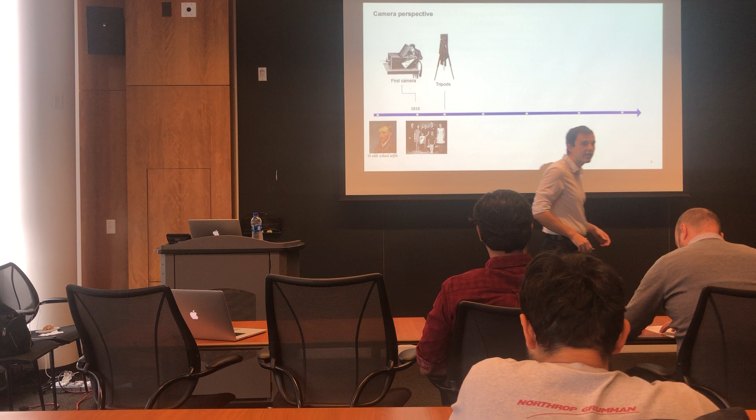So I'm going to begin with the motivation behind this topic and also some of the related work. The act of recording images is something that's intrinsically human, and we have been doing this for millennia. For a very long time, the only way to record images was using paintings. But then in 1816, the first camera was invented, and this has changed the way we do many activities in human life.

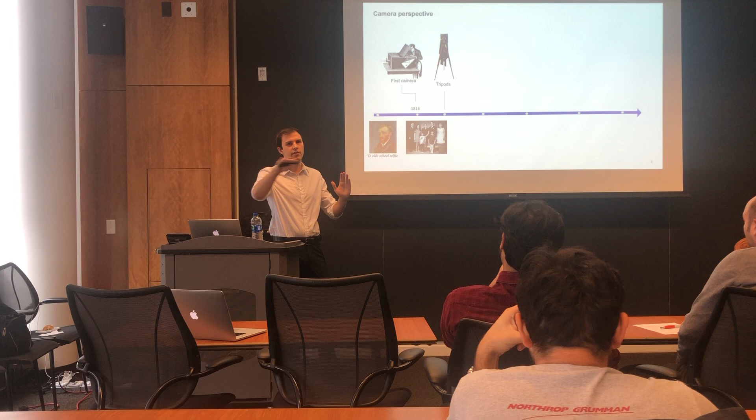But in this talk, I'm going to focus specifically on camera perspective and how it has evolved over time. Initially, people placed cameras either on top of tables or on tripods, and the kinds of images you got were usually on the horizontal level, and they were very static scenes.

But then, an invention came up in 1907, the dolly. The dolly is basically a camera on a rail, a camera on wheels, that you can move in a particular direction. This allows you to apply the notion of movement, of continuity, to an image, or in this case, of movies.

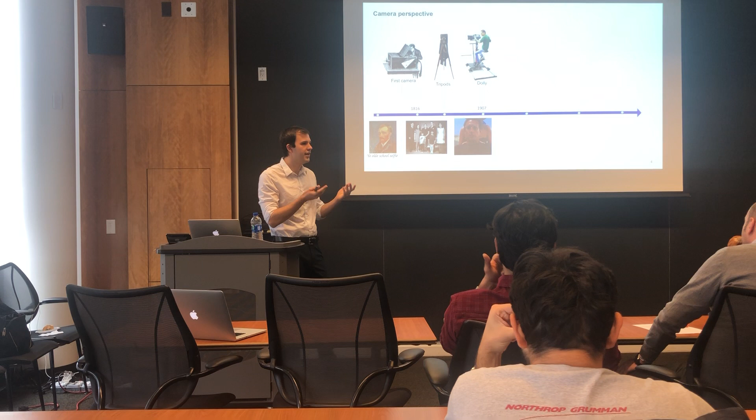Another very important invention that changed camera perspective was the selfie stick. Like today, the selfie stick is kind of a joke. It became very popular, but it's actually quite an old invention. Supposedly, according to the internet, this was the first selfie ever taken in 1925. What's nice about the selfie stick, jokes apart, is that it allows the operator to have this third-person perspective of him or herself in a very easy manner.

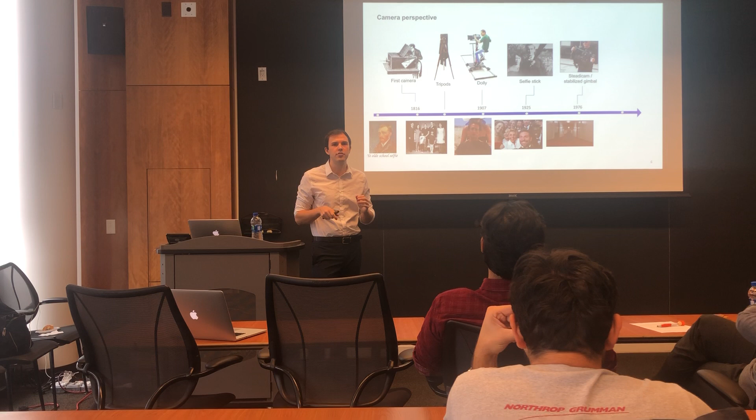Another big innovation that came about 50 years ago was the Steadicam, or the stabilized gimbal. What's interesting about this is that you're not constrained to rails like in the dolly when you're trying to move a camera, because the stabilization allows you to generate very visually appealing images while traveling in any direction.

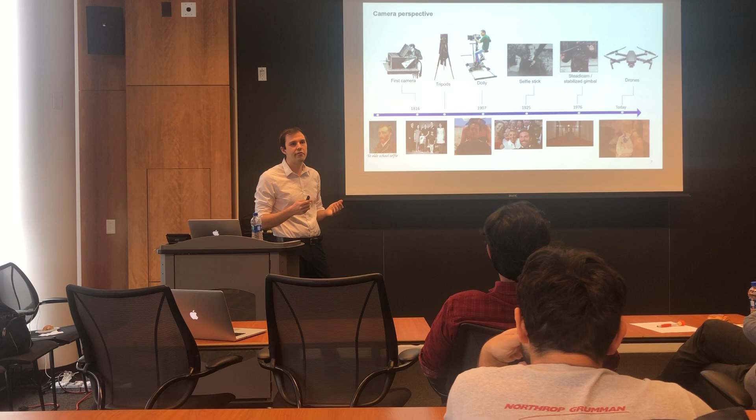And the last thing I want to talk about, and actually the focus of this presentation, is drones for filming. Drones are a very interesting invention because drones with cameras take advantage of all these previous technological innovations into one single device, and they allow us to achieve viewpoints that have never been possible before.

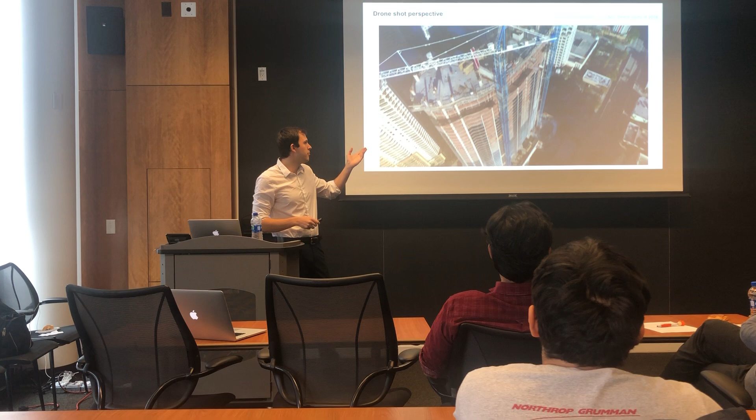These are just a few examples of very nice footage obtained with drones. You can see that we have these third-person view perspectives, very stabilized images, and we can achieve motions without the constraint of rails. We can film landscapes, actors, and moving objects in a very cheap, reliable, and safe way.

Now, there are many applications where we can use drones or the images generated by drones. For example, we can record sports, both indoors and outdoors, professional movies, recreational activities, any kind of social event. These are applications where what matters is the actual image produced by the drone.

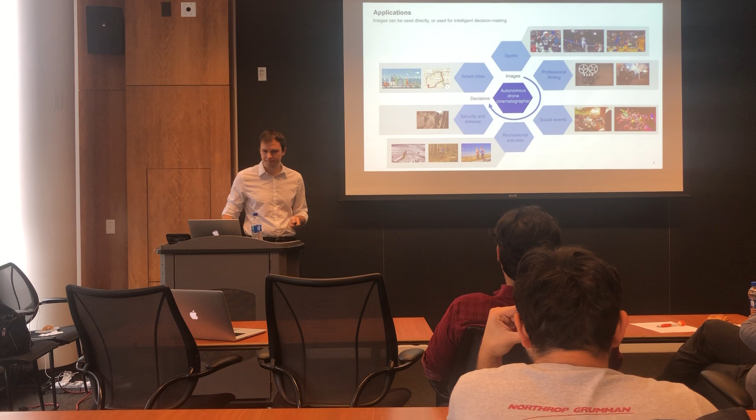But we can also think of applications where what matters are the decisions we're going to make based on those images. For applications like defense and security, you're going to follow a target and make decisions based on what you're seeing. Also, we can think of a very hot topic nowadays, smart cities, where you could use the images generated by drones to understand traffic patterns and the flow of people in the environment.

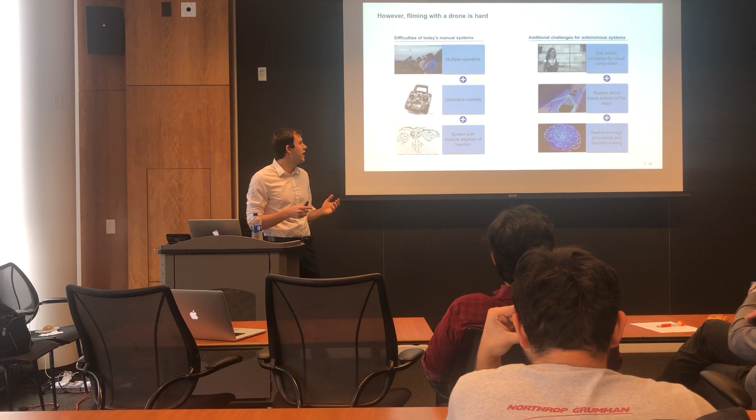But the act of filming with a drone is really hard, because it's a very complicated system, and in practice you usually have multiple operators controlling one single drone. Usually one operator only controls the aircraft itself, a second operator controls the camera independently, and sometimes you even have a third operator that controls just the focal distance of the lenses.

You also have very unintuitive controls. Usually those RC controllers are related to the attitude of the aircraft, but what actually matters when you're filming is how the image looks on the screen. A drone is inherently a system with multiple degrees of freedom, so it's hard to control in general.

And there are many more challenges that come when you're trying to automate a system like this, because you have to take into account a lot of artistic principles into your motion plan, and these principles are usually in the mind of the director, of the operator of the camera, but you have to take them into account analytically. You also have to, if you're filming moving scenes or moving objects or people, take into account forecasts of what's going to happen next in the scene.

And you have to do all this processing and decision making online and on board, which is non-trivial given that we have small and non-powerful computers usually on top of drones.

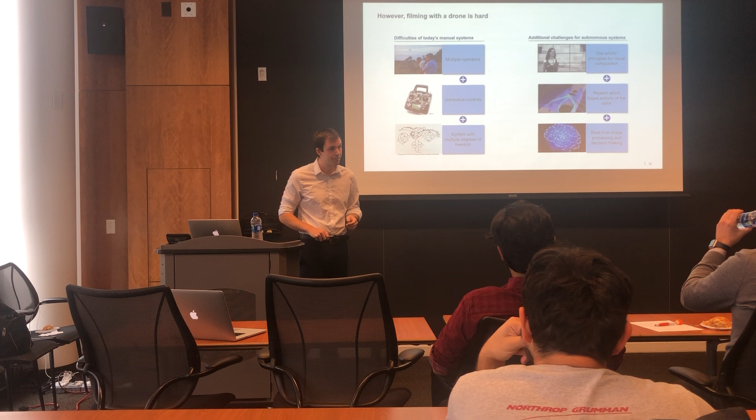Now let's look at some related work that gives us the big picture of which area is the area of drone filming. The first one that we would think about is related to UAV applications, such as high-speed flight, formation flight, or inspection.

But we also have to take into account aspects from computer graphics and arts, such as placing cameras on virtual environments, and also there's a lot of literature on the principles behind movie making, like in Hollywood settings, for example.

And a third big area that intersects with those two is motion planning, because we have to take those artistic principles into account and generate feasible motion plans. And we also have to represent the environment around us somehow.

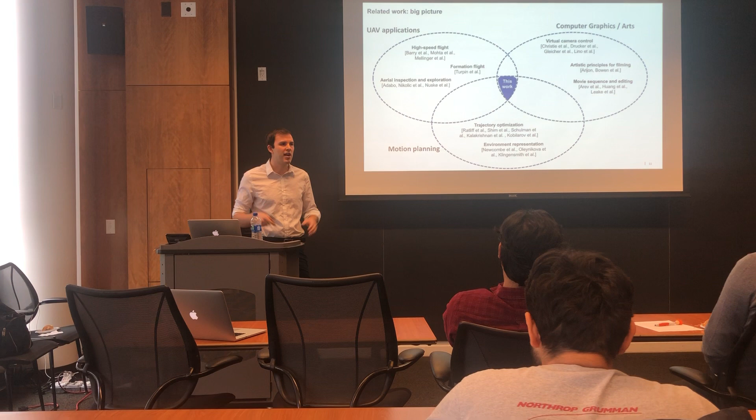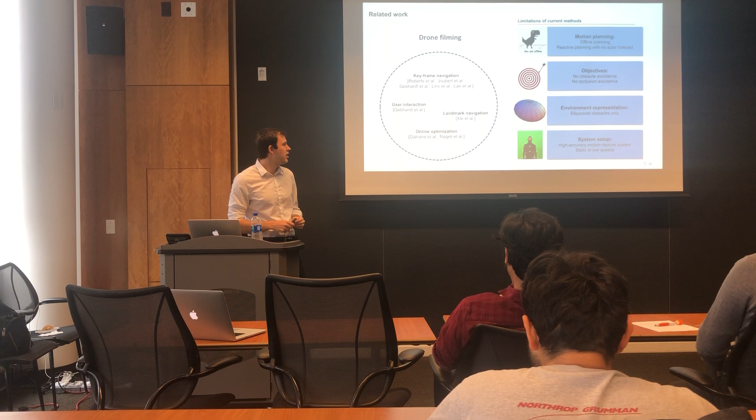And specifically on that intersection, on drone filming, we also find some work that has been done. There's a lot of work on keyframe navigation, or on the user interaction between those cameras and whoever is operating them, landmark navigation, and even some work on optimizing trajectories online for filming.

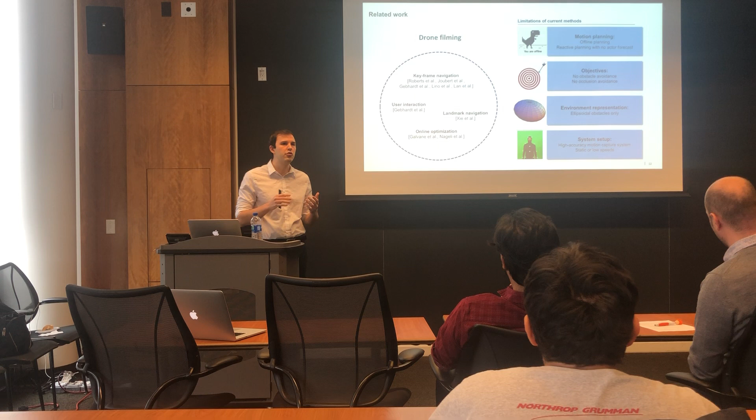But even though these previous works take a very nice step towards making these systems deployable in practice, there are still quite a few limitations. In terms of motion planning, many of these works only deal with offline planning, so you must have very scripted scenes. Or they sometimes plan without any notion of forecasts of what's going to happen next, so they have very reactive motions to changes.

In terms of objective functions, some of these papers don't deal with avoiding obstacles at all, and most of them don't deal with the concept of occlusions generated by obstacles on your image.

We also see very simplistic environment representations in most cases, where they treat all the objects in the environment only as ellipsoids, but in fact we have any kind of shapes for obstacles.

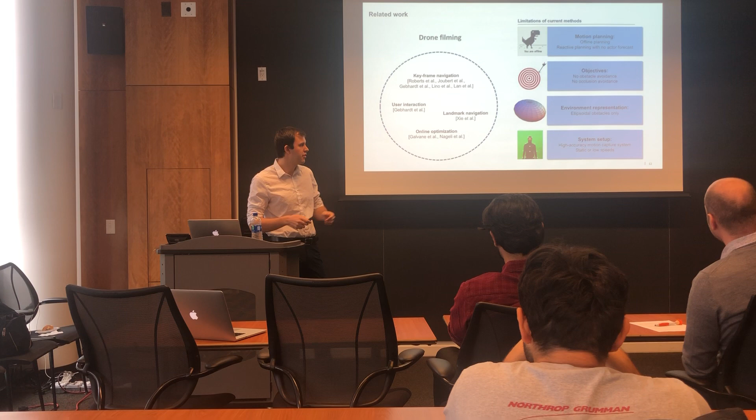And fourth, we see some limitations in terms of system setups. Most of these papers only deal with motion capture systems where you have a very accurate localization of your actor. But in practice, you have a lot of noise when you're trying to localize a person or a car, etc. in space. Or they only deal with very static or low-speed scenarios.

Based on these limitations that we see in previous work, we defined our objectives, our contributions in this paper, where in terms of motion planning, we want to plan motions online using forecasts of what's going to happen in the scene. In terms of objective, we want to avoid both obstacles and occlusions.

We want to be able to represent obstacles of any shape, not only ellipsoidal shapes. And we want to be able to work in realistic, high-speed environments, being able to film any kind of actor, like people, bicycles, or cars.

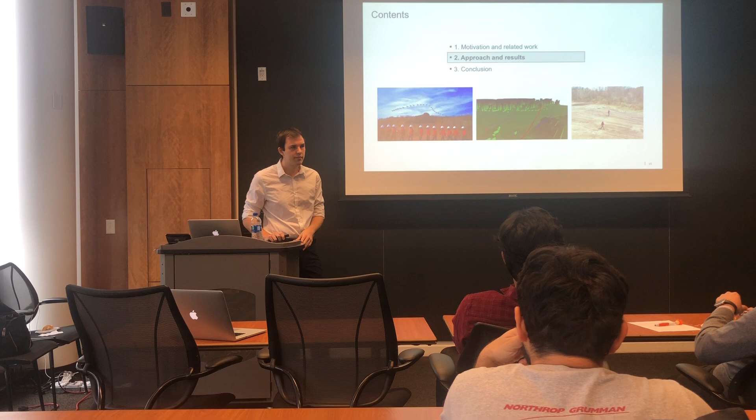Now that we know our contributions, I'm going to explain to you our approach and give some results. And before I jump into the approach, I just want to show a quick video so you can understand what the system is doing in practice.

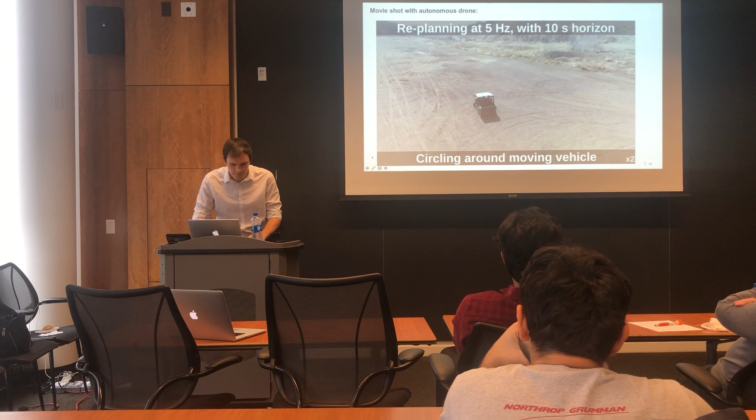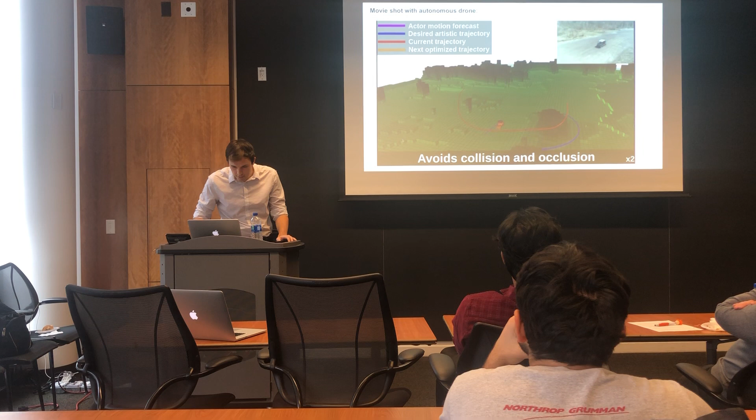So this is a fully autonomous shot taken with our system, and the drone identifies the actor's location. It's doing a circular movement around the actor. And I'll just pause for a second to highlight a few things.

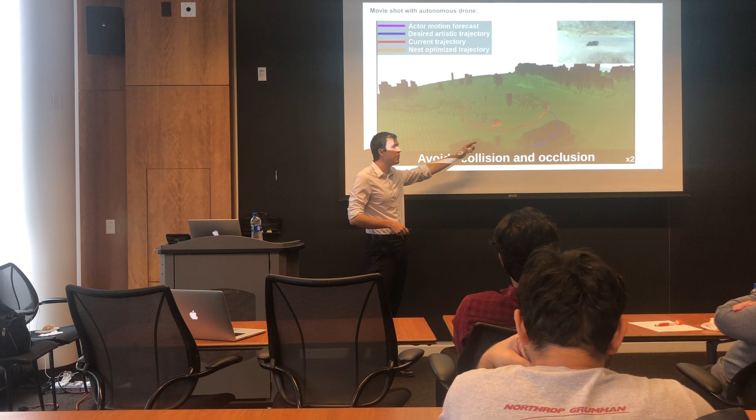Given measurements of the actor's current position, we feed them to an activity forecasting module that gives us, using a Kalman filter, this purple trajectory over here. That's an estimate of where the actor is going to be in the next 10 seconds.

And given this forecast and the director's artistic principles, we calculate the blue trajectory that tells us where artistically we would like to be if there were no obstacles in the environment. In this case, we're circling around the moving actor.

But you can see that the blue trajectory is either going to collide with the mountain at some points, or it's going to be occluded by the mountain. And that's why we plan for the red trajectory online that avoids colliding with obstacles and avoids being occluded.

We can also handle different types of shots and actors. In this case, I'm riding my bicycle, and we're doing a right side shot. You can see that the drone smoothly adapts to go to my right side, avoiding this mountain, and re-planning online.

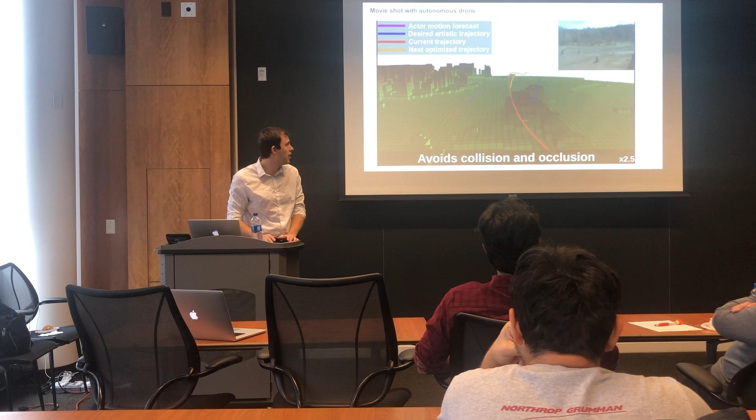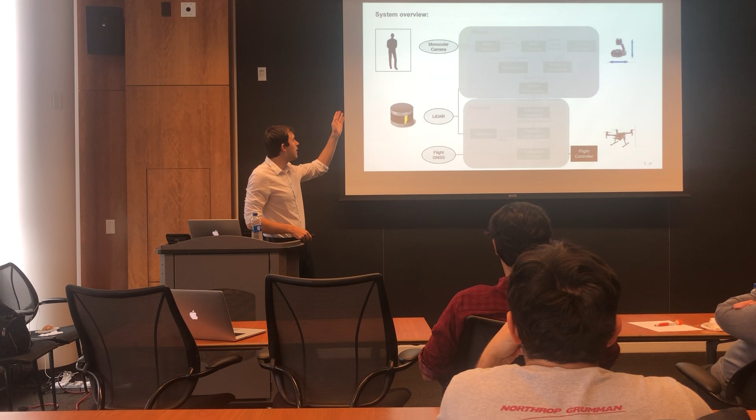Now I'll talk about the actual system that we have. Before I go into the details, I want to show you the inputs and outputs. As inputs, we have the image from the camera, so it's a monocular image.

We also have LiDAR information about the environment that creates the map. Just a disclaimer, for the results you'll see in this presentation, we made an offline map. But as future work, we're already working on putting a LiDAR to map any kind of environment as we fly.

We also have the drone's state estimation gained from IMU and GPS. As outputs, we can control the camera independently of the movement of the drone itself, and of course, we can control the drone.

Let's look at the first big box. This is what we call the vision pipeline. What happens here is from the monocular image from the camera, we detect the actor, getting a bounding box of the actor. After the initial detection, we track this template over time in the next incoming frames at a higher frequency than the detection.

Over here, you can see that we can control the gimbal to maintain the actor on the desired position on the screen. So even if the actor tries to move, we're going to actively control the gimbal to keep him, let's say, centered, or you can use other artistic principles for that.

After we have a bounding box of the actor, we do two things in parallel. The first one is what we call ray casting. We project a ray, usually at the bottom of the bounding box, which corresponds to the feet of the actor, onto the ground plane, so we get an estimate of where the actor is at this moment in world coordinates.

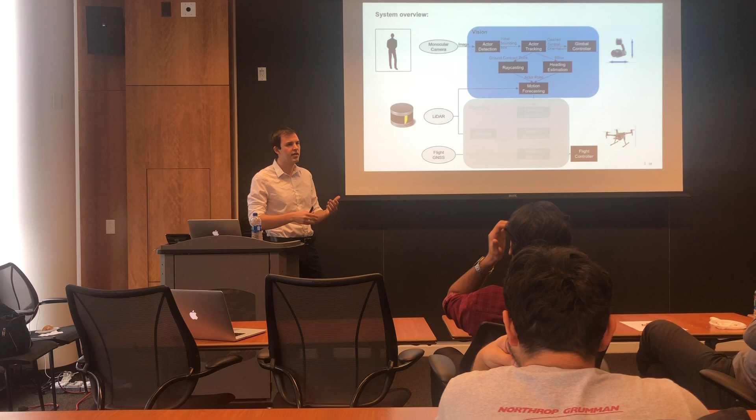The second big part of our system is what we call the planning pipeline. Given the actor's motion forecast, the map, and the drone's state, we calculate a trajectory, and then we follow this trajectory using our drone.

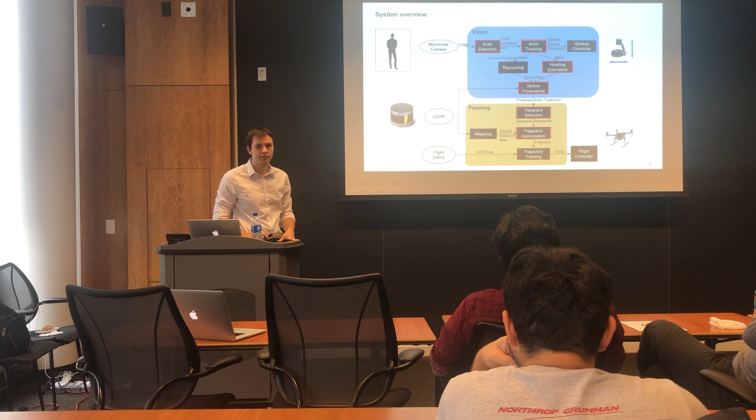Now I'm going to explain to you a few of the most important pieces of this system. The first one is the actor detection and tracking module.

The first thing that we do is we get this monocular image from the camera, then process it with a custom trained neural network. It uses the MobileNet architecture to get some features of this image, and then a YOLO detector that gives us the most likely bounding box around the actor. This operation takes about half a second on our onboard computer.

After we get this initial bounding box, since this operation takes a while to detect, we just track that template over time in the next incoming frames with a KCF filter. Lastly, we actively control the gimbal to keep the actor on the desired screen position.

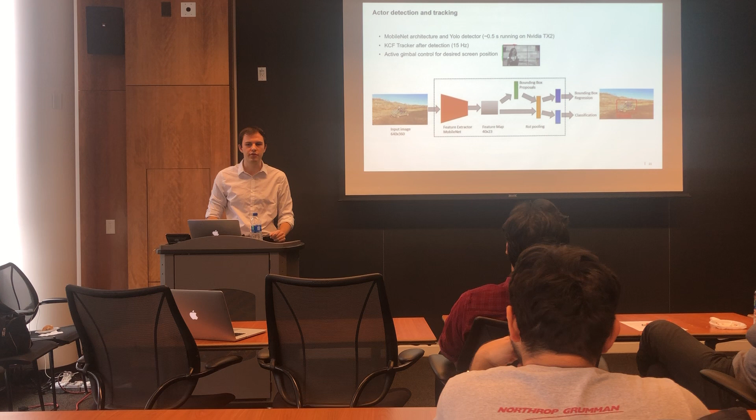After we get this bounding box, after the detection and tracking, we have two modules happening in parallel: the ray casting and this heading estimation module. Here, we regress the image from the bounding box into a heading angle for this actor.

There was a lot of interesting things in this work, because there's not an actual aerial dataset with heading directions labeled, so we had to create our own dataset. Then we faced this issue of obtaining enough training data for the system, and that's why we used both the labeled losses to train our network, but also exploited the concept of temporal continuity, because usually the actor doesn't change heading very drastically between consecutive frames. So we also exploited this information while training.

But the focus of this talk is not really this module, even though it's very interesting. Feel free to talk to us offline and ask more about this. And Wenshin, who's sitting here, was the main contributor in this part.

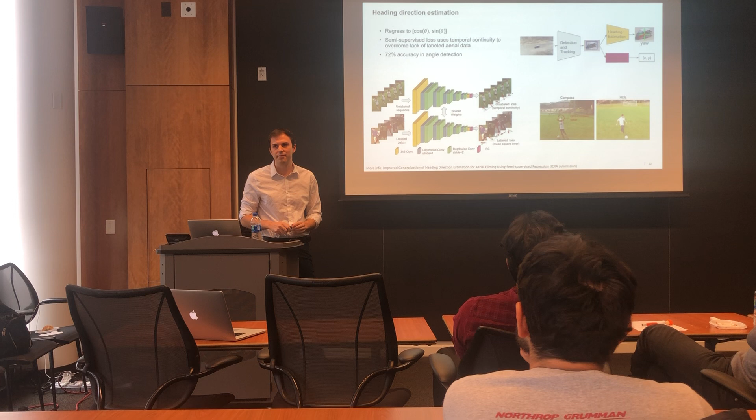After we get an estimate of where the actor is and the current heading direction of the actor, we feed them into the motion forecasting module. For this, we use a Kalman filter with both kinematic models for people and for cars.

We have to make this separation because people can change directions and velocities much more suddenly than cars, which are constrained by steering angle. This Kalman filter works quite well in practice, so most of the time we see almost linear trajectories for the actor.

This is an example: in white we have the ground truth, in green we have the forecast for the next few seconds. It matches quite well, but we also see a few examples with bad predictions.

If the actor does a drastic turn to another side, you get an offset. Also, imagine there's a tree in front of the actor. The Kalman filter only uses kinematic information to make its predictions, so it would predict that we'd go through the tree, but in practice you would either go left, right, or stop.

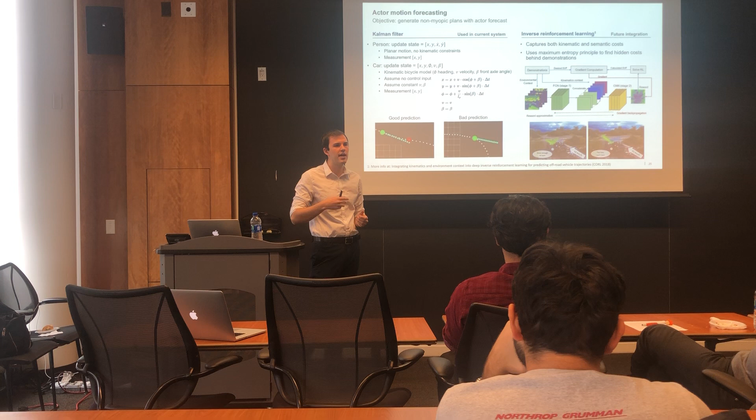This motivated us to try another method for forecasting actor position using inverse reinforcement learning. Based on a lot of demonstrations of an off-road vehicle driving on trails, we tried to extract a reward function—the implicit costs that the driver tries to optimize when going through the trails.

This was also quite an interesting paper that we presented at CoRL earlier this year. If you're interested, you can ask more details offline, but in our system we're using the Kalman filter, and those are the results you'll see today.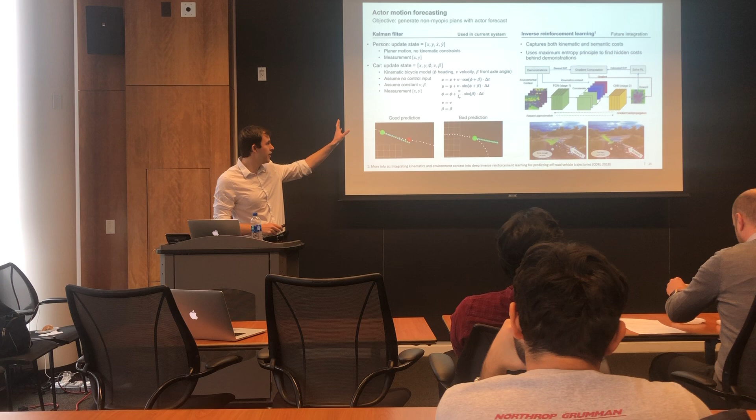Now that we know where the actor is heading in the world, we have to think about the motion planner. There are a few things to consider when thinking about the planner. The first is, what is going to be our state representation?

We need a state that's able to accurately model our quadrotor, but we also don't want to represent unnecessary states that would just make our motion planner slower. We also have to design cost functions that are accurate enough to model the actual behavior of the director when filming.

At the same time, these functions have to be simple enough to run on an onboard system. Third, we have to think about the motion planner algorithm itself.

It should be complex enough that we can obtain non-trivial solutions in complex and challenging environments, but at the same time it has to be able to sustain performance in real-life conditions.

Some numbers we set as targets were a frequency of about 5 Hertz for this planner to operate at, and a 10-second time horizon. These goals were set based on the velocities involved in drone filming and the scale of objects we usually deal with, like trees or piles of dirt.

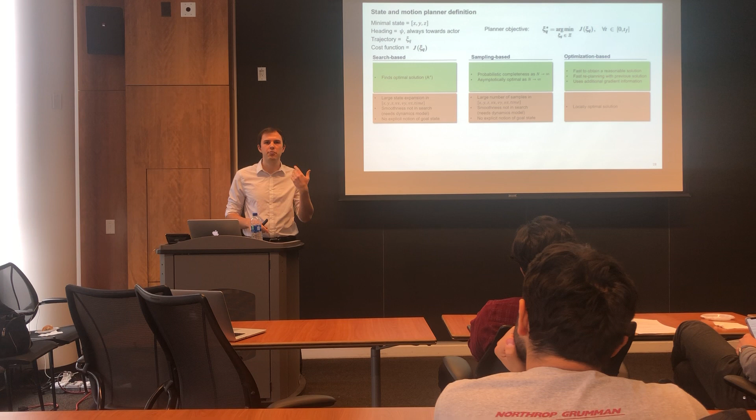The second big category is sampling-based planners. These planners also come with very nice guarantees. If you're using an algorithm like RRT, you're guaranteed probabilistic completeness, so you know you will find a solution as the number of samples goes towards infinity. If you're using something like RRT star, you know that asymptotically you will find the optimal solution. But we face the same problems as with the search-based planner of having quite a large state space representation, and that's also not very desirable.

The third big category is optimization-based planners. These planners have some interesting properties for our problem because they can obtain a reasonable solution that's going to be locally optimal, but not globally optimal, and they can do that very fast. They can easily take advantage of a good initialization, and usually we use the solution of the previous planning problem to initialize our next optimization. Due to these properties, we thought that optimization-based planners were more appropriate for our problem.

But there are many techniques inside optimization planners that could still be used. You have what are called potential fields, which basically try to repel your state away from obstacles. These are some of the first optimization-based planners developed. You have model predictive control, where you require a pretty good model of the dynamics of your system, and you optimize for both the optimal states for this trajectory and for the control outputs together. But a disadvantage is that since this is quite a complex optimization operation, you end up in practice only having very small time horizons, such as half a second or maybe one second into the future.

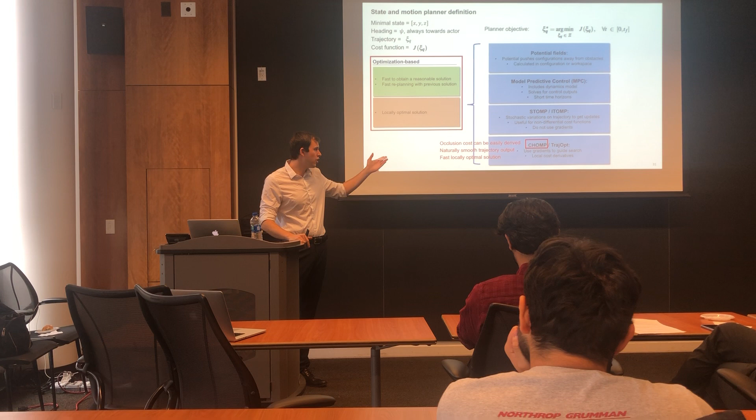From those two methods, we modified the CHOMP motion planner. I thought especially the definition of the occlusion cost function could be nicely derived by using some properties of the obstacle avoidance cost of CHOMP, whereas in TrajOpt this derivation is not so trivial or simple. CHOMP also gives us a naturally smooth output as the solution, and it gives us the solution quite fast. That's the rationale behind these choices.

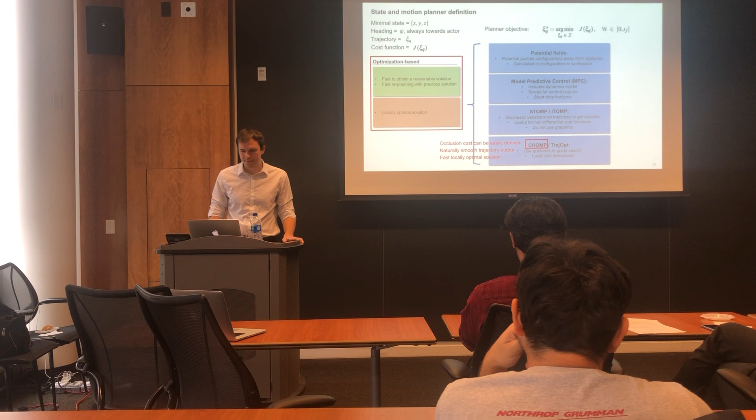Now that we've defined the state representation and the motion planner, we can move to the definition of cost functions. The way I came up with these cost functions was by reading a lot of books on cinematography, reading related work, and also having talks with movie directors and actual cinematographers to see what objectives they try to optimize when filming. In many cases it's quite intuitive for them, and they sometimes have a hard time even explaining it to somebody else. So it was an interesting process.

The main functions I found were obstacle avoidance, because you clearly don't want to hit anything while flying; occlusion avoidance, because you usually want to have your actor in sight most of the time; smoothness, because a shaky video is not visually appealing; and the artistic intent cost, which is going to be a little vague right now, but I'll explain it in more detail later.

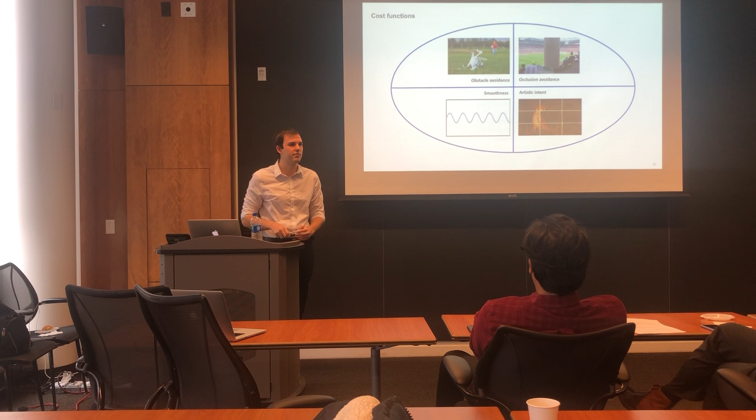And we also define a penalization, a cost C, that depends on how far away you are from an obstacle, up to a distance epsilon. So if you're at epsilon, your cost is 0. If you're further than epsilon from an obstacle, you also have 0 cost.

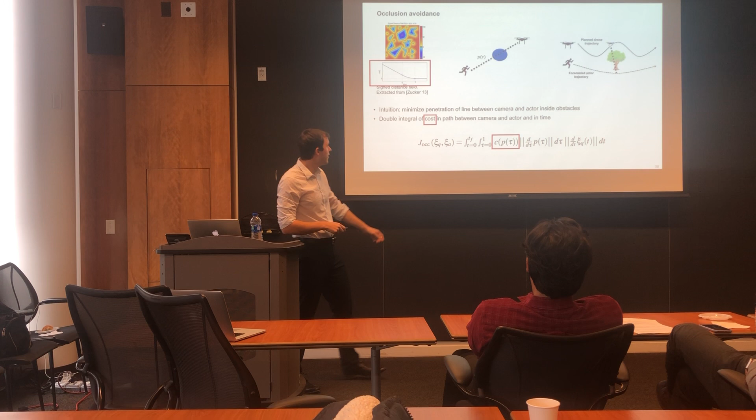So imagine that we freeze a path parameterized by tau. We're going to integrate the signed distance penalization over this path. Again, we have to multiply by the velocity along the path, for the same reasons as the obstacle costs.

But this was only for one pair of actor and camera position. Then we have to integrate this over time as well, because we want to minimize occlusion over the entire trajectory. So we're basically integrating the penalization of signed distance over this 2D manifold that connects the camera and the actor over time.

What's nice about this function is that it can be represented as a quadratic cost that has an analytical Hessian, and later I'll explain why this is really important for the optimization. In practice, we minimize up to jerk—so we minimize the first, second, and third derivatives of our trajectory.

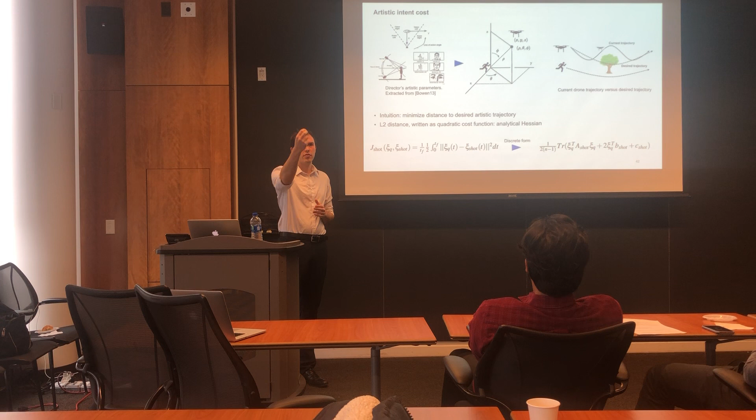And finally we come to the artistic intent cost. This cost was derived based on a lot of literature I read and conversations with directors. I tried to distill the main basic parameters that define a shot when a director is filming. The first is the line of action angle, which represents the relative yaw between the actor and the drone—so if the drone is in front of the actor, that would be 0 line of action angle.

We also have what's called the tilt angle, which tells us how up or down the drone is relative to the actor's horizontal plane. Third, we have the shot scale, which means how close or far away the camera is from your actor at each moment.

What's nice about this set of parameters is that for any position of the actor, we can define one unique XYZ position for the quad rotor based on those three parameters—basically placing the quad rotor using spherical coordinates around the actor. We can do this for every instant of time in the actor's motion forecast, and obtain what we call the desired artistic trajectory, telling us where the director would like to be for this particular type of shot.

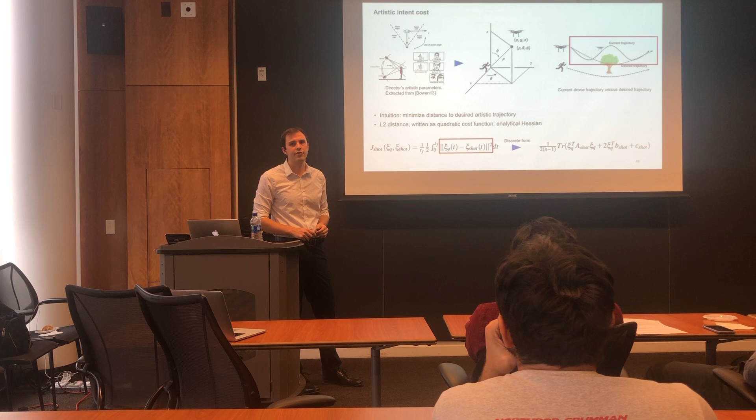When you look at the cost function for the shot quality, it's actually quite simple. We calculate the average distance between the current iteration of our trajectory in the optimization process and this desired artistic trajectory—an L2 distance. Another good property is that in discrete form it's also a quadratic cost, so we have an analytical expression for the Hessian.

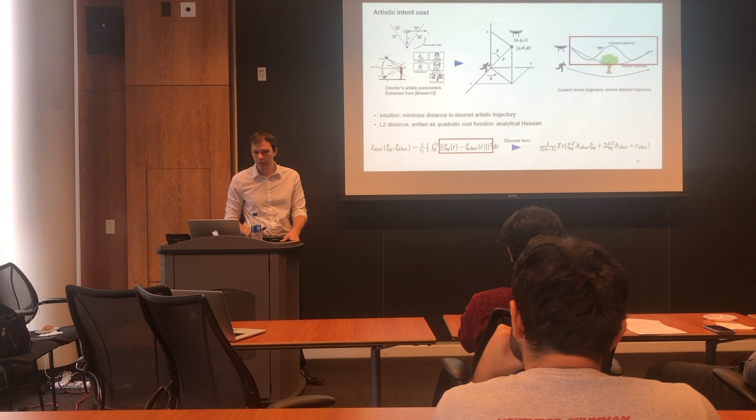Now that we defined all 4 cost functions, we can define the main cost function J, which is simply a linear composition of all 4 costs, each multiplied by a relative weight lambda. The objective of the planner is to find the trajectory that minimizes the overall cost.

Here's where we adapt the CHOMP algorithm to our particular planning problem. Initially, we get an initialization for trajectory ξ of the quadrotor. Then the first step is to calculate a matrix called M inverse, which is basically an approximation of the Hessian of our cost J. What's nice is that we can calculate this matrix outside of the main optimization loop, so we only do one matrix inversion.

In the main optimization loop, up to a maximum of Imax iterations, we check if our convergence criteria has been met. If it has, we just return the current trajectory. If not, we take a step in the direction of steepest gradient descent of our cost function J, multiplied by this approximation of the Hessian function.

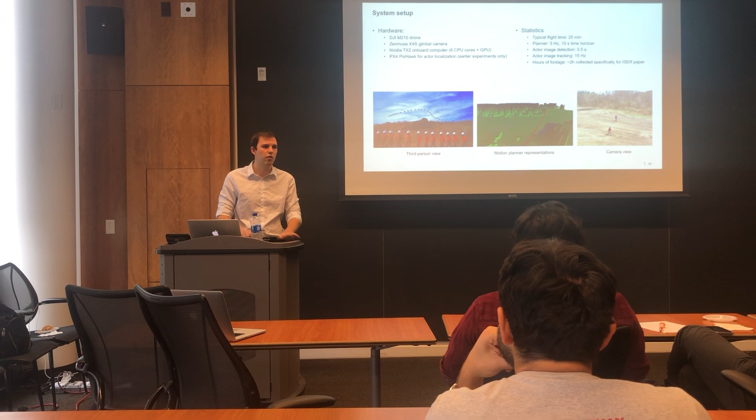Specifically for the paper we presented at ISER, we collected about 2 hours of footage with the system, but overall in this project we have collected many more hours.

This is how a typical flight test goes. We have this pre-mapped environment, and the actor can go on any path he or she desires, and the drone is going to execute the desired shot type while avoiding obstacles for safety and occlusions.

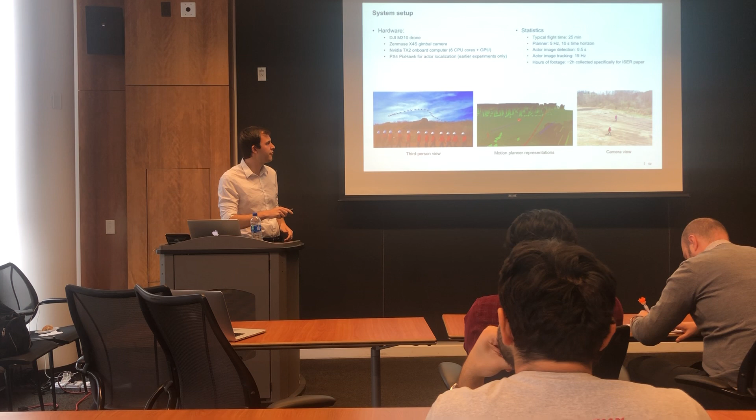This is what the motion planner sees: the current actor position, the forecast, the desired artistic trajectory, and the current trajectory being executed. On the right side, you can see the view from the camera of the drone itself.

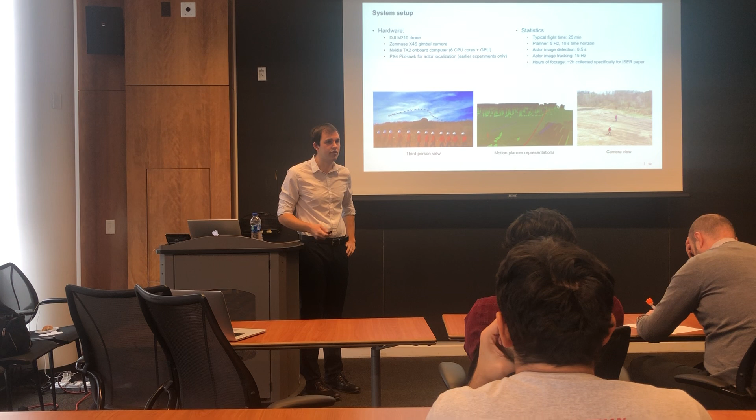We also have done tests comparing the impact of the occlusion cost function that we introduced. In this first row, you can see how a test goes if we do not take occlusions into account. You end up not seeing anything in the image. You won't see the actor, because the mountain, even though you're not colliding with it, will be in front of your camera.

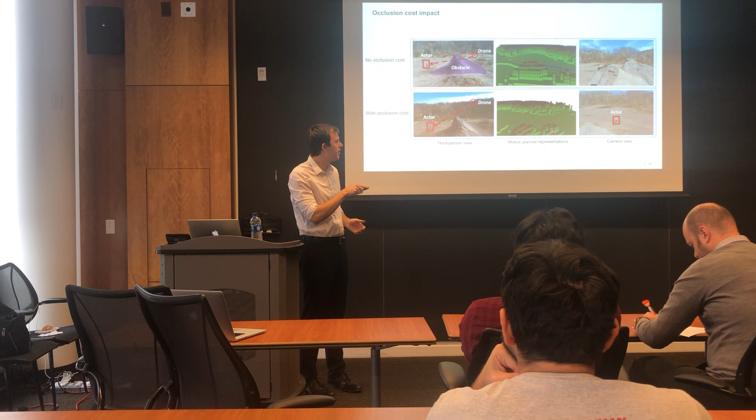But if you do take occlusions into account, you make sure that your drone always has the actor on sight, and we find a very nice and smooth trajectory above the mountain that tries to stay as close as possible to where the director would like to be, but avoids occlusions.

We also have field tests with different types of actors and different types of shots. Here we do a circular shot around a person. We have a right side shot with a biker, and a left side shot with this car at high speeds.

We also have quantitative results where we compare the power or the role of the occlusion cost function in the optimization. So we have this simulated environment with a bunch of spheres which are randomly placed, and we did tests looking at two metrics.

One is the actor visibility along the trajectory, and the other is the average distance to the desired artistic position. As the number of spheres in the environment goes up, we see the actor less. But if you take occlusion into account in your cost, you will have much better performance in terms of seeing the actor compared to if you don't. The trade-off is that since you're avoiding occlusions, you may be much further away from the desired artistic position.

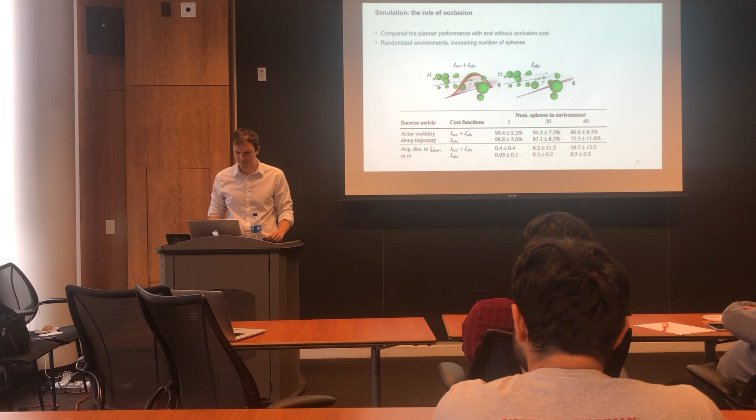Now we can go to the conclusion of this talk.

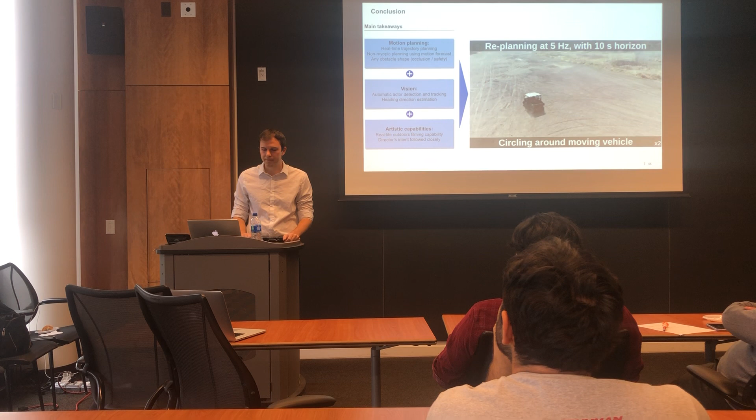In summary, in terms of motion planner, we show the development of a motion planner that can plan trajectories in real time with these non-myopic forecasts of the actor's trajectory, and also avoid arbitrary shapes of obstacles for both obstacle avoidance and occlusion avoidance.

Second, in terms of the vision pipeline, we are able to automatically detect, track, and localize the actor in space and estimate the actor's heading at each moment of time.

Third, in terms of artistic capabilities, we are able to film these actors in real life outdoor environments, even when we have a lot of noise in the localization of the actors, and follow as closely as possible the director's artistic intents.

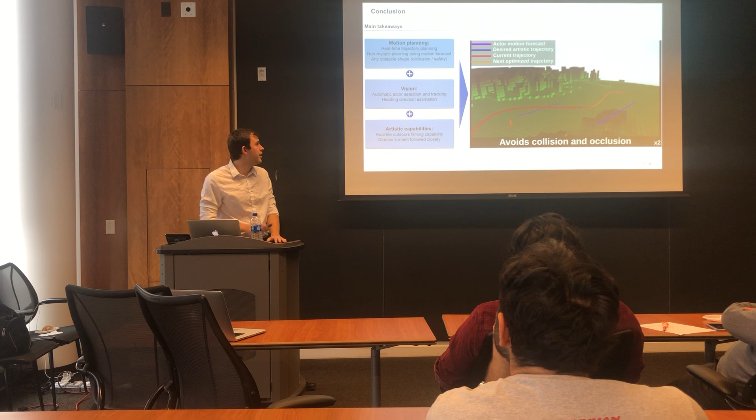Here on the right side, you can see a few of the shots that we generated with our system. In this case, we're tracking a biker, circling around him, and we're not hitting the mountain.

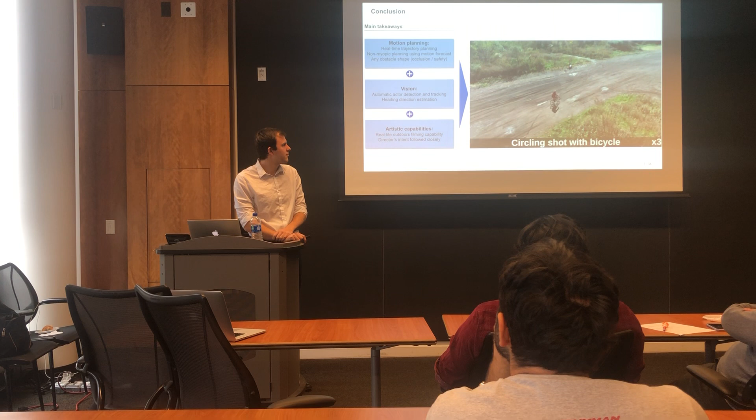And we have a lot more footage that, if you're interested, you can see.

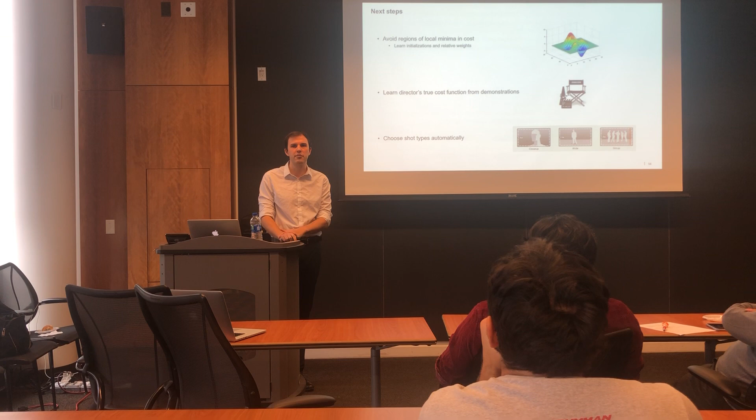In terms of next steps, something I mentioned before was that since we're using an optimization-based planner, we are finding regions of local minima in our cost landscape, and we're trying to see how we can learn initializations and sets of relative weights so that we can be closer to the actual globally optimal cost for our trajectories.

Also, something we're looking into is how to learn from demonstrations of good footage the director's true artistic intent and true cost functions that he or she tries to optimize with intuition.

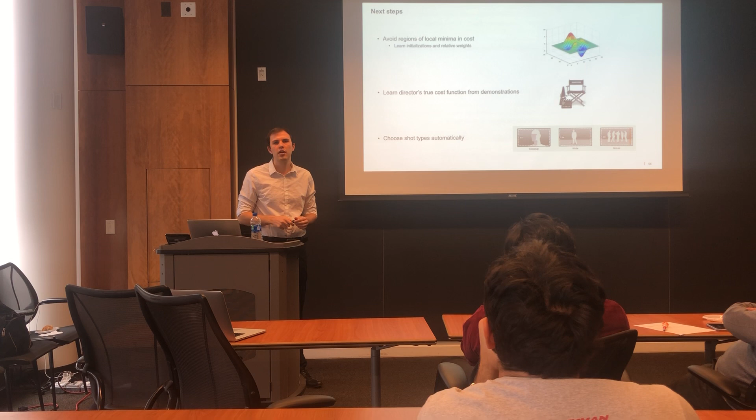Third, we're looking into how to automatically choose the right types of shots for each given environment. For a particular environment, you may want to do a right side shot because this will avoid obstacles more easily and look nicer. So we're looking into how to learn these shot selections from demonstrations.

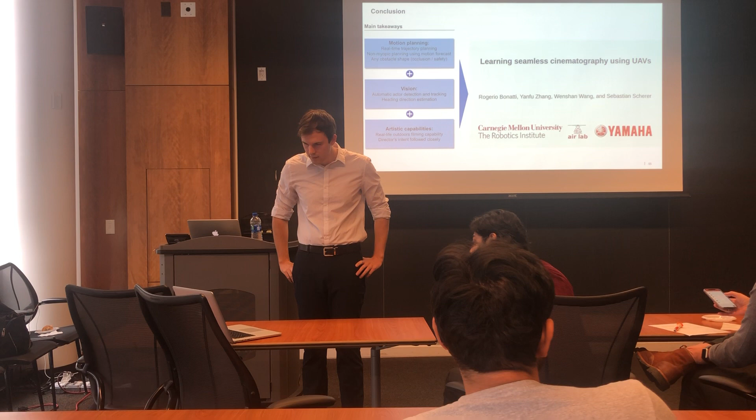Yeah, so that was a design choice that we made, not to include the zoom. What we do if we want to change how close or far we are from the actor is we change the shot scale, so we would physically be closer. But for this version of the cost function definition, we don't include zoom.

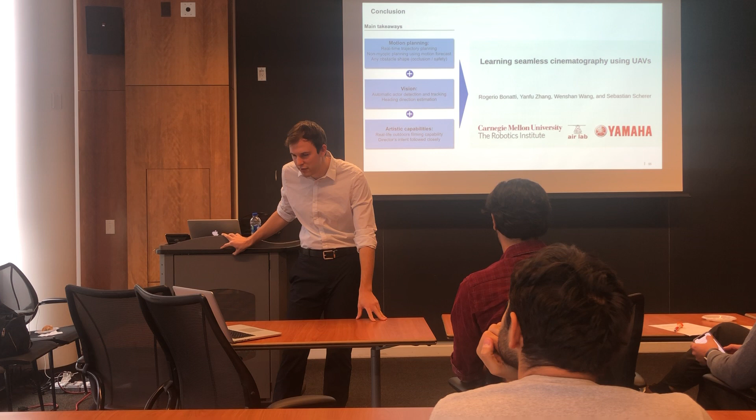Okay, that's fine. I was also wondering a little bit about, you said you talked to cinematographers. Do you have any sense of what type of input they normally like to provide for controlling these kinds of persistent parameters? Like, would they want to specify a yaw and tilt angle, or is there some other type of input that's kind of more intuitive to them?

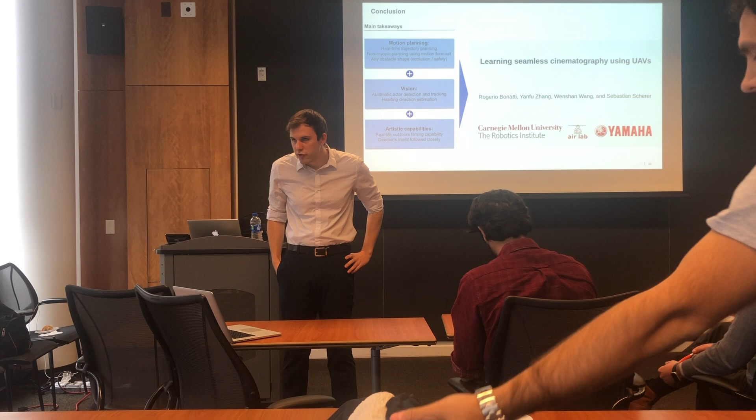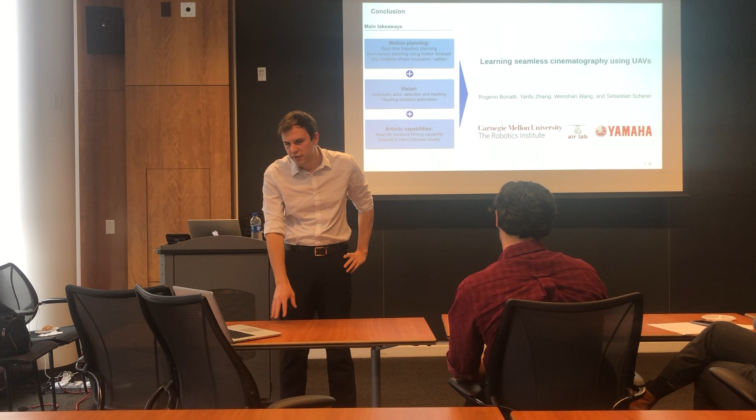They usually, so when I define the artistic intent cost, I try to use their terminology. So they do use, they call it line of action angle, the tilt angle, and the scale. So they do use these parameters. And something that actually they said it's really important, but I don't have in this work, is lighting, how the light is scattered over the scene is an extremely important factor. But for this paper, we don't have that included.

Interesting. And I guess a related question, just curious on tying into the application side for movie making. Do cinematographers usually like these parameters to be fixed over the course of a single shot? So you always want to have a single sort of angle that you're tracking the target for the whole shot, single scale, things like that, or do they sometimes want to vary these, like zoom into the target and things like that?

It varies a lot on the application. So the question was, do those parameters usually remain constant over the scene, or do they change? I think it depends a lot on the application, because if you're doing a very scripted scene, let's say you're filming a commercial for a product, for a car, then you might want to change those parameters over time, but they would be very predefined.

But let's say you're filming a person snowboarding in a mountain. This is not really a scripted scene, but you would want the parameters to vary over time so that your shot is not boring. Because if you keep the same parameters the whole time, you're going to lose some visual appeal. That's why usually you want to change those parameters to keep the attention of people who are watching.

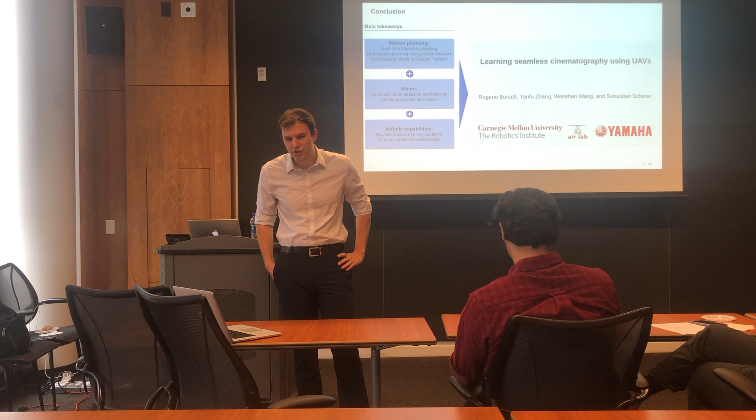Okay, that makes sense. I guess another question, have you thought about how you might extend this to, let's say if there's multiple actors that you want to track, like in a team sports scenario? Yeah, so we actually ran a few tests, so right now our framework only receives one actor as input.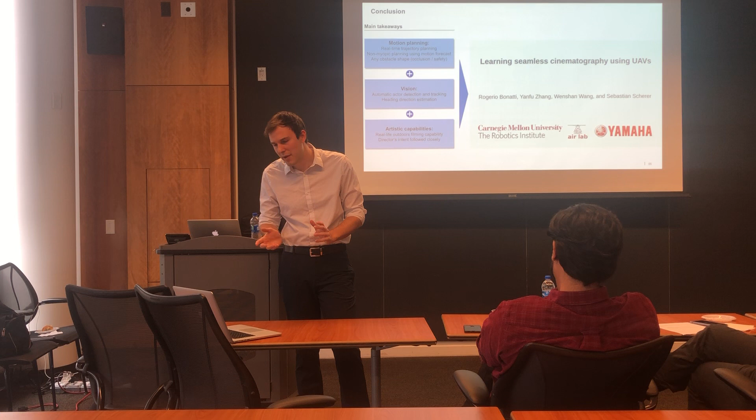We did a few tests where we had multiple people playing soccer with one ball, and whenever we lose confidence in the tracking of an actor, we redetect actors in the image, so it sometimes switches between people. But another very interesting and different problem formulation would be if we have multiple people, should we film, let's say, a centroid of whoever is playing basketball or soccer? So I have thought about it, but I haven't actually done these kinds of experiments yet.

Okay. Yeah, that sounds good. Thanks. Okay, thank you. Yeah, I can go next.

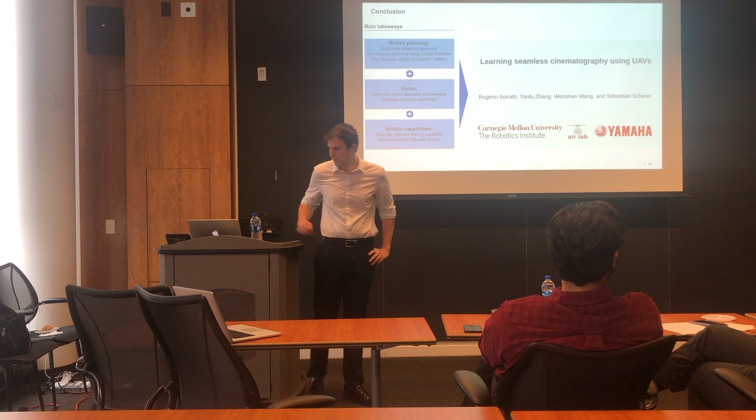I think as we've spoken about in our offline talks, I like the topic. I think it's cool. I haven't seen too much on it, so I think that's always a nice thing to have sort of a topic that's sort of neat. I've got a nitpicky thing.

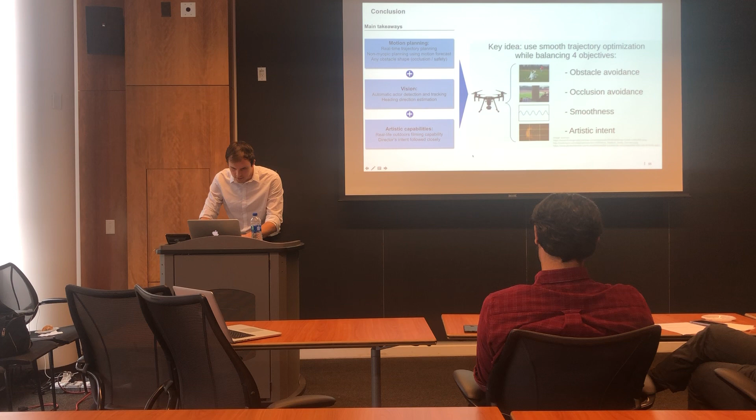On slide 41, I think, I was confused a little bit. You're at 41, again just nitpicky. We'll go forward to 42 actually. Why is that the trace? Because if that's a vector, if delta Q transpose A shot, why is there a trace there? Trace is typically applied to a matrix. That's a scalar output. Why is there a trace around that?

It's because this trajectory here is defined as x, y, z. So is x, y, z, is this a big vector or is this a matrix? So I have x, y, z for each position in time. So I have x, y, z. All right, so that's a matrix. Okay, so I was right. So if that was a vector, okay. Yeah, sorry, yeah. Okay, so this whole thing, right.

ξ is a matrix. And then are there any constraints on that, or is there no constraints on that? They're allowed to be real. It's constrained to be like a real valued set.

Are there any constraints on what the trajectory ξ can be? If you're feeding this in, you're saying you've got a closed form deterministic solution. That's true if there's no constraints on it, but if it's constrained, then that's not true. So are there any constraints on that? No, it could assume any real value of x, y, cool.

So that was jarring, a little nitpicky thing, but that's good. I actually have a related question, maybe just a follow up, on this A_shot - does this have to be recalculated every time you solve it again? At every planning problem, but not in the main optimization. Sure, yeah.

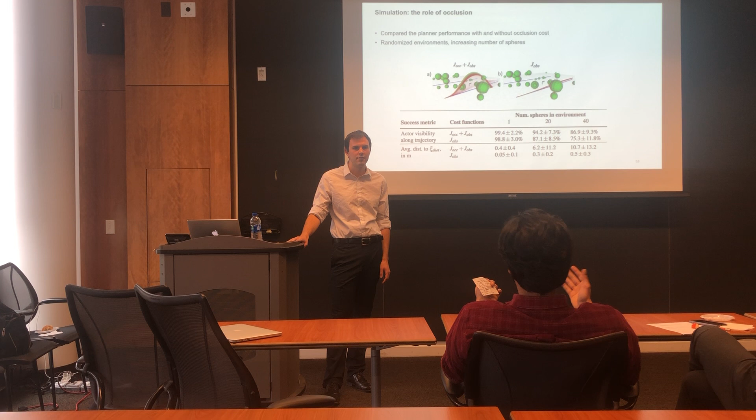I had just one more clarification question. For your heading detection from images, since you know where your quadrotor is and you're using a fixed focal length, do you really need to go through the effort of throwing it to CNNs when you could get a primitive estimate of the motion using just projective geometry? You've got a bounding box detector, you know how tall humans generally are, so given a temporal sequence of detections and the fact that you know your camera position and pose, one could assume you could figure out the heading direction anyway.

I agree you could do some calculations to avoid detecting the heading explicitly, but especially for people, you could just be moving in place. Then in that type of case, you would not know where the right side is, for example. People would also walk sideways, so that's why we take this approach. I think that's fair.

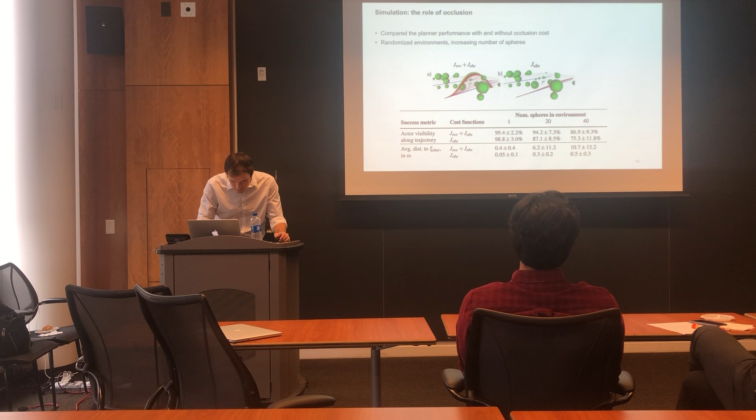One final clarification question. On the slide where you showed the signed distance field thing, I was slightly confused because the cost function I saw versus the illustration didn't match, so one side differs. You said inside the obstacle the cost function keeps increasing, right? No, inside the margin epsilon. Outside of the obstacle, after epsilon, it should be zero. But I was confused because when I was seeing the cost function outside the obstacles, it's increasing to 100.

Oh, sorry. This is the actual value of the signed distance, and this is the visualization of the signed distance, not the cost function itself. This is the value of d, and this would actually be c of d. Maybe this notation is not the best, but you would get a value of 100 over there, and you would go to the x-axis of this plot to like 100, which would be pretty far from epsilon, and that would be zero cost.

Yeah, this is not the cost, this is the visualization of the signed distance. Okay, so I thought this was slightly confusing, it threw me off a little. I agree, I should improve these visuals.

One more question. How do you determine your lambdas, and how sensitive is your algorithm to the lambdas for different types of actors?

It was determined mostly in simulation. I was the human optimizer in the loop, and I tested a bunch of values for lambda that provided good motions for the drone in the type of environment we were operating in.

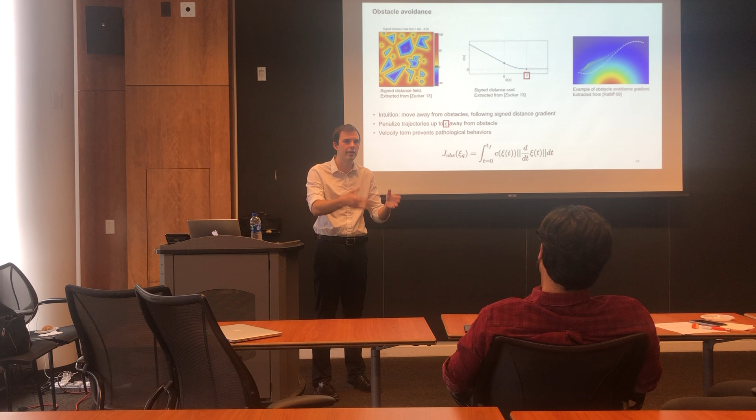So is it different for each type of actor or type of shot, or is it just one set that more or less works for different types? Right now it's one set for the outdoors environment called Gascola, so I selected one good set of weights specifically for that. If we go to another environment, I may change the weights, so it's environment dependent, not actor dependent. It doesn't have to do with the actor itself.

I was testing those sets of weights already in simulation. I could simulate the actor walking or a car being driven, and it's not very sensitive. I selected a set of weights that would work well both for people and cars at low and high speeds.

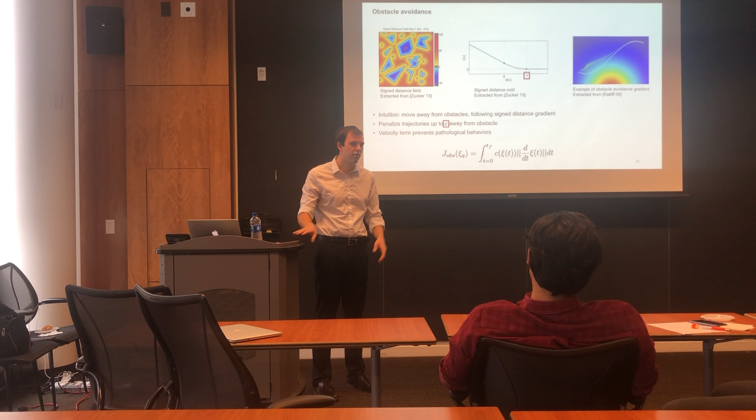But something we're also looking into is how we could have adaptive weights, in the same line of idea of trying to achieve the global minimum of the cost. How could we change the weights such that we can go to the global minimum, or get closer to a better shot?

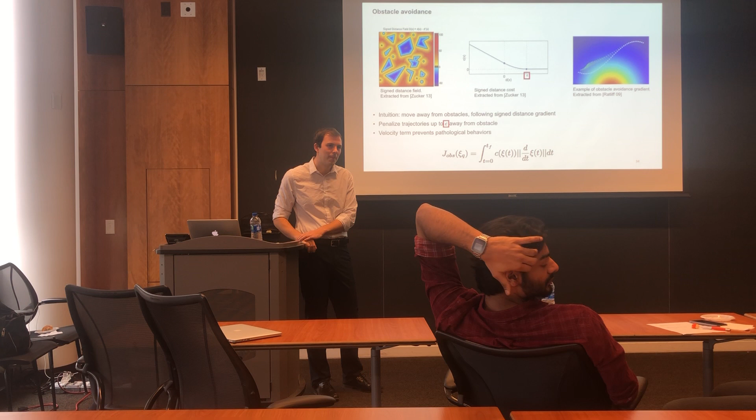From the artistic intent of the director. Okay, thank you. Thank you.